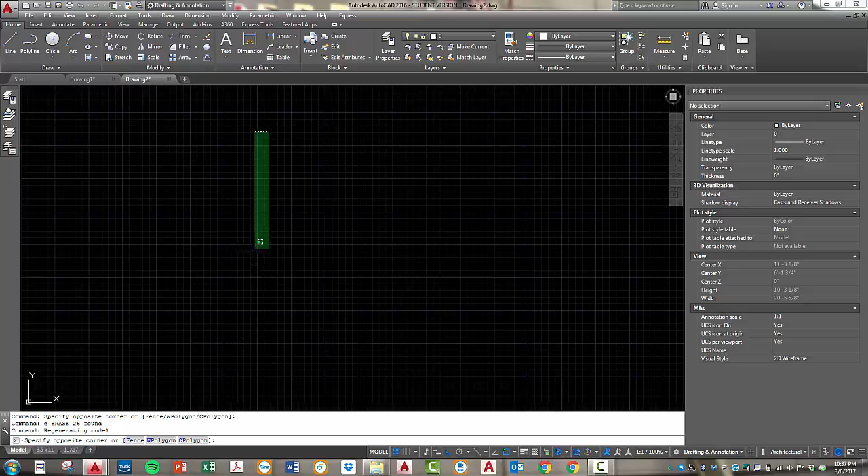I'm going to use lines instead of a rectangle. Pick a start point, come straight down 8.25, go straight across 11.5, and come back up 8.25, and just pick the end point to close it out.

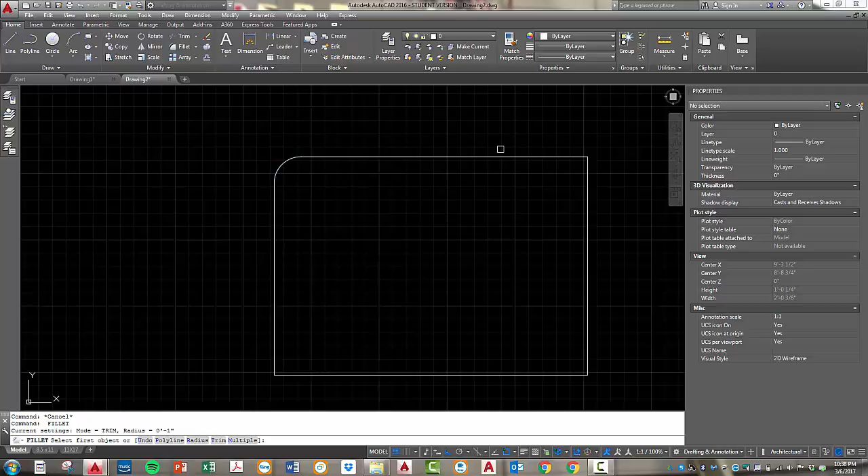Each corner has a radius of 1 for a fillet, so I'm going to use my fillet command and pick radius, type in 1, hit return, pick that line, hit the space bar to get back into fillet, pick, space, pick, space, pick.

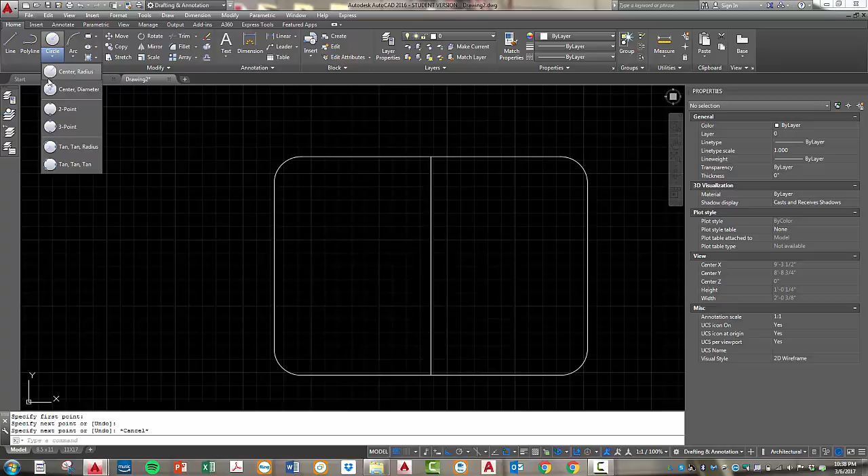There's a circle at the center of this, which is a 2 1/4 inch diameter circle. A bunch of different ways I can do it, but I'm going to do it the easiest way. Go right from the line from the top middle point to this middle point. I'm going to draw a circle, center, diameter, hover over the midpoint, type in 2.25. Now I have my circle. Now I'm going to draw a horizontal cross here from side to side.

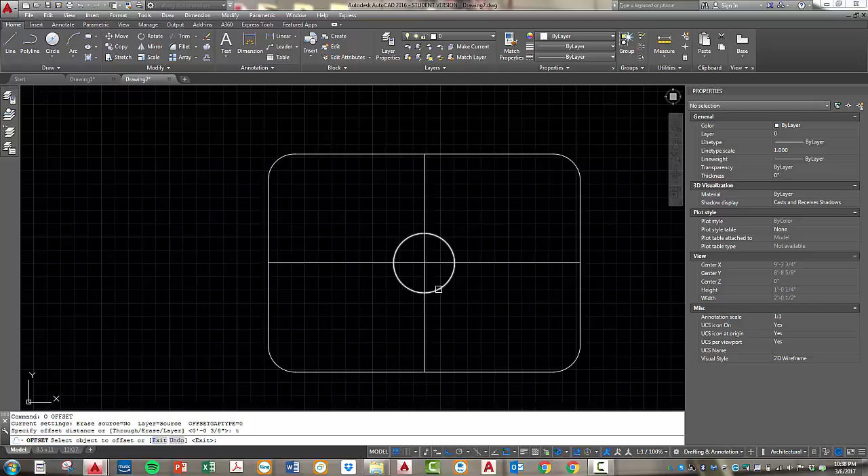I'm going to offset the circle here using the T command, or through, T space, pick that and just come out a little and pick. Now I'm going to use my trim command, select that outer circle, hit the space bar, and then just go around the horn and pick these here. I'm going to erase that line out, that circle out.

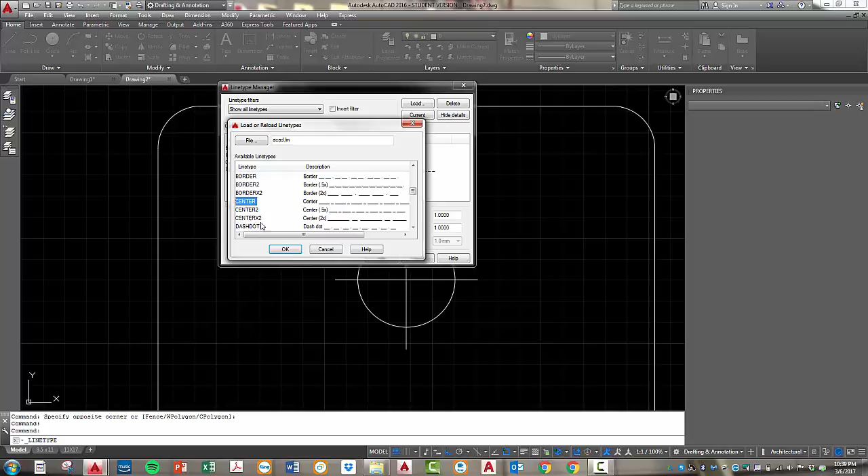Now I have a cross here. I'm going to select it, see if I have a center line in here. I don't. So I'm going to click on Other, Load. I'm going to scroll on down until I see Center, okay, pick the 2 again, drop down, center. Slap some dimensions on it, linear dimension from here to here.

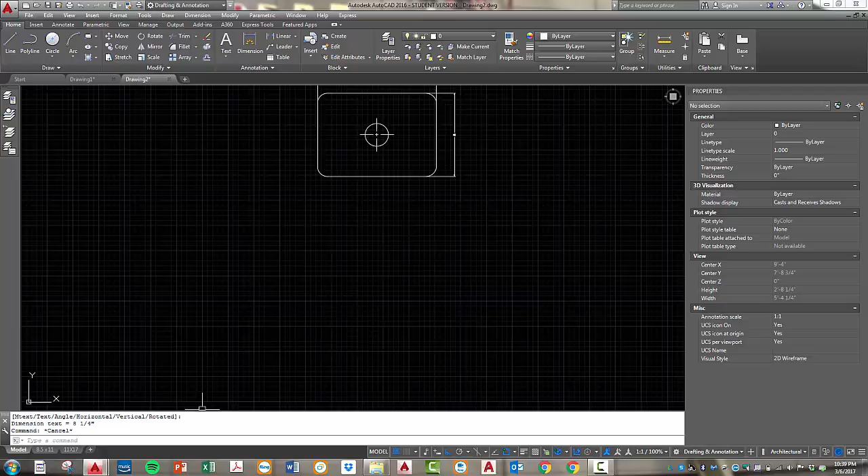Now there's a side view of this item, and you can see the bottom of it has 2 sloping ends. So what I'm going to do is pull these lines straight down from here, so I'm right below it. It tells me it's 4 inches across the bottom to get to the break point. So I'm going to use my offset command, 4 return, select this point, and select that point.

I'm just going to draw a line just straight across. The plate is 3/8 of an inch thick, so I'm going to trim between there and there. So that's the bottom of the plate.

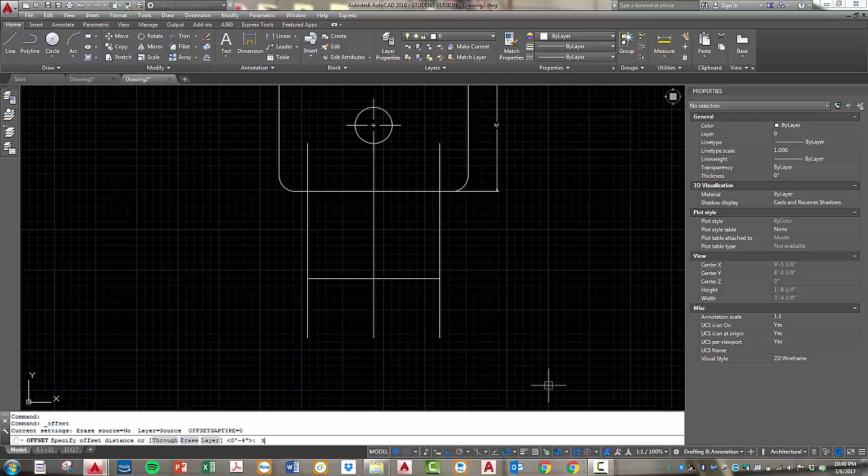And I'm going to offset this line 3/8 of an inch. Offset, 3/8 return, pick that line, go up with it. On the left edge it gives me 2 dimensions, 1 3/4 over and 1 inch up. So I'm going to pick my line command.

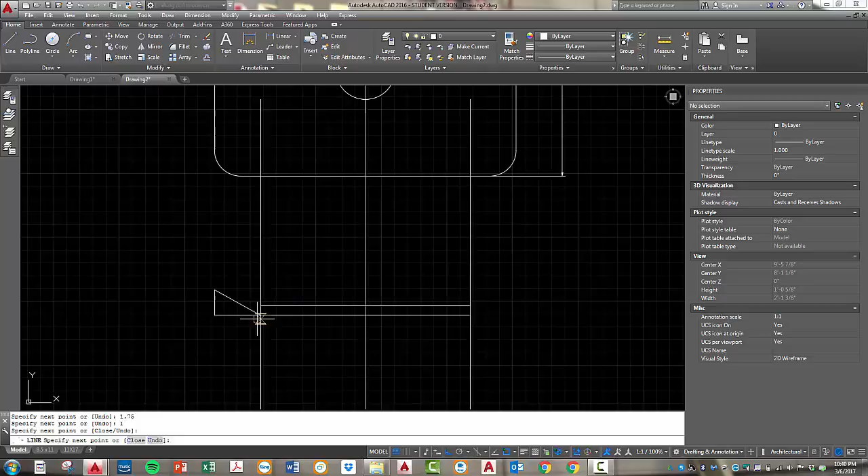Starting point is this end point here. I'm going to go over 1.75. I'm going to go up 1, hit return, come back and just pick that intersection where I started. I'm going to erase those 2 lines, and now I've put in the slope portion of this plate.

Go back to my offset command, hit the return to accept the 3/8, pick the item, offset it. I'm going to use my fillet command, but with a radius of 0 to fillet these 2 points right here. So fillet, R space, 0, return, pick, and I have a fillet there.

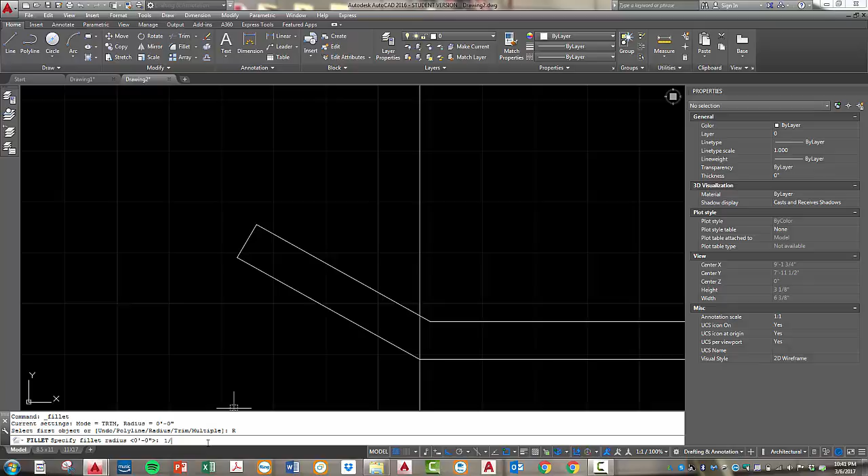I connect these 2 endpoints with a line, L space, from endpoint to endpoint. This top corner has a 1/4 inch radius on it, so back to my fillet. I need to put a radius in, 1/4, return, top line, pick, there.

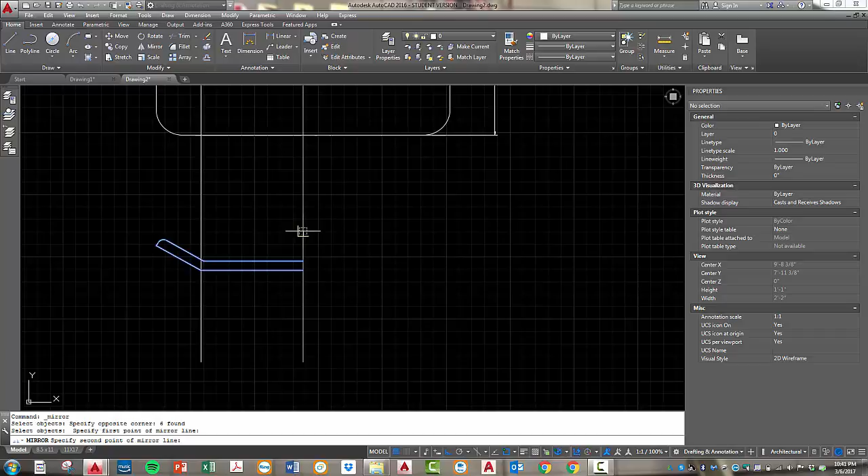So I want to mirror all this to this side, but to make sure I get exactly half and half, I'm going to use my trim command, select my center line, hit the space bar, and just trim everything to the right of it. I'm going to erase that. Use my mirror command, I select all these, hit the space bar because I'm done selecting, pick, and now I have my plate drawn to scale.

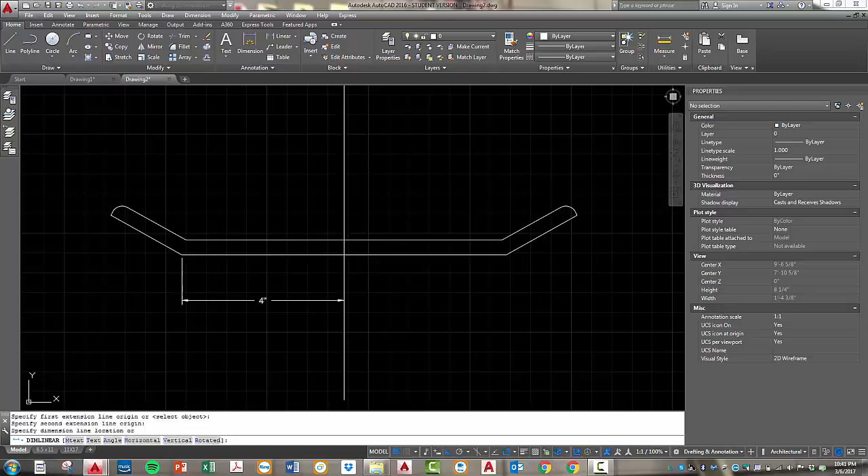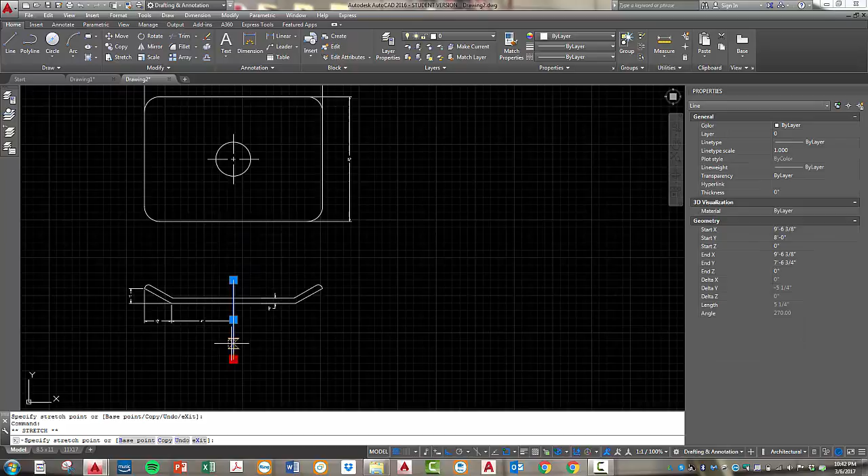To put dimensions on it, I'm going to use my linear dimensions. Add a center line.

Now the last thing I'm going to do is bring the seam right here where these meet. I'm going to pull that up and draw a line from that intersect straight up. I'm going to trim it. Hit the space bar, pick.

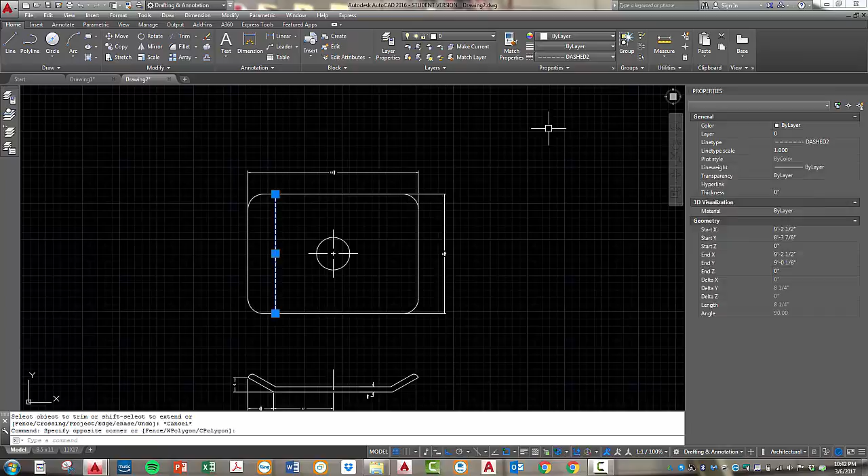I'm going to change it to a dash line. And I'm going to mirror that. And we're done.